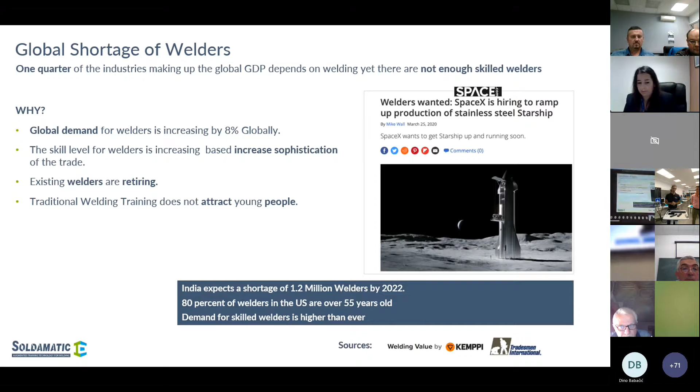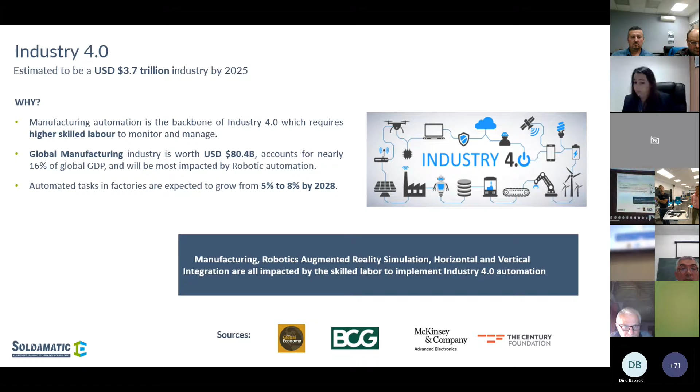Industry 4.0 is here to help as well. Technologies like augmented reality are going to make both the production more efficient when it comes to welding production, but also welding training more efficient. Augmented reality is just an example of that. Also, COVID has made it more and more imperative to digitalize different types of solutions, and this is one clear example. In the education system, we can see that everything is digitalizing, and even practical manual skills like this one.

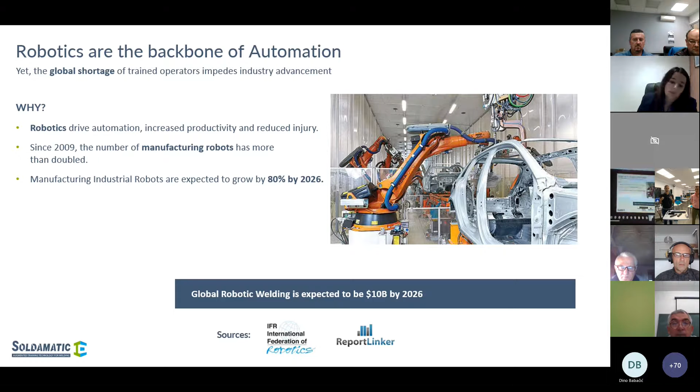Furthermore, we can see that the trend of the industry is to automate, to get robots to replace humans. But in the welding industry, this is an opportunity, but it's also a challenge. The challenge is that you find operators that know robotics, they know how to handle robots, and you have operators that know welding. But very rarely will you find one single operator that knows both things together. And that is a very special challenge that we are also able now to answer to.

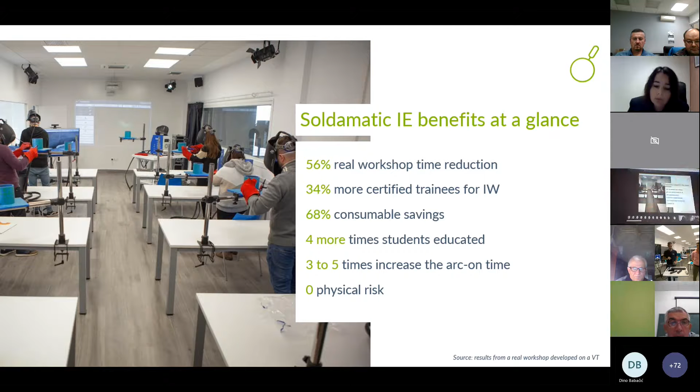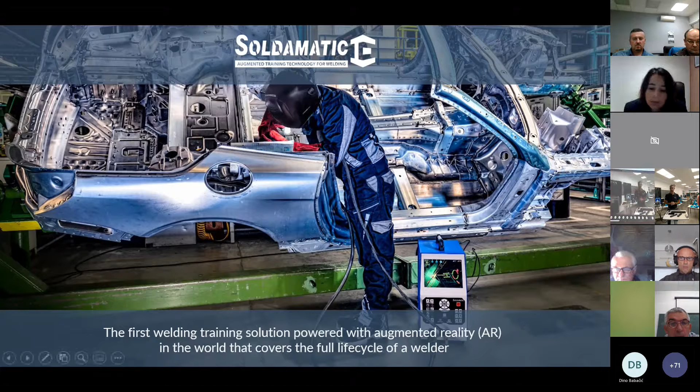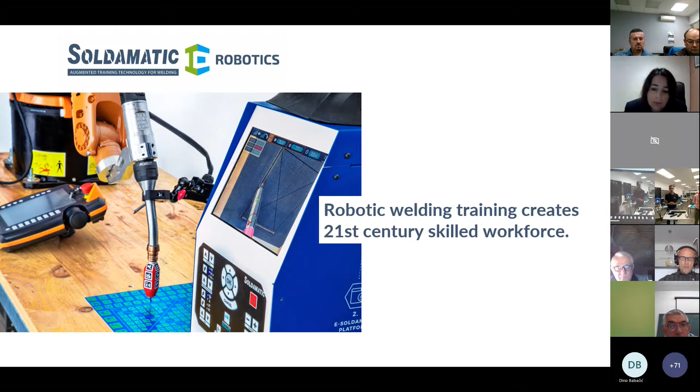Also key to mention, this system is not only for manual welding, as we said, it's also for robotic welding. That means it can be connected to a real robot, and you can do the simulation by working with a real robot as well. This is key, because even though robotic welding is not yet in the curriculum for welding training, it's going to be, because there is a tremendous need for robotic welding operators in the industry. So we are already able to provide a solution to the government for that.

Now we are going to make this a little bit more interactive, and provide you with a live demonstration of the system so you can fully understand how this works, both from the perspective of the teacher and from the perspective of the student. If you have any question in the meantime, you know there is a button to raise your hand. Feel free to use it, and we will clarify during the demonstration.

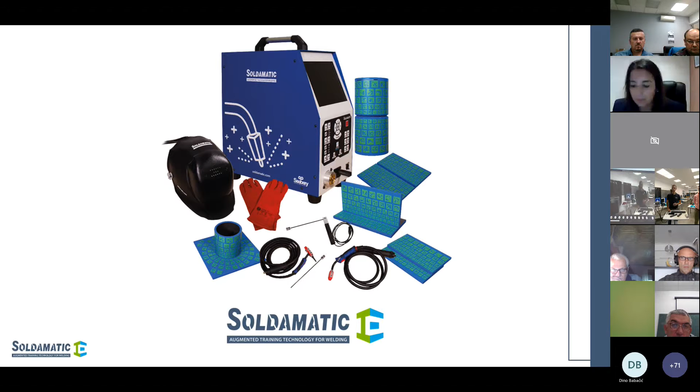Okay, so I have stopped sharing my screen, and what I'm going to do is show you first the components of this system. What you see on top of this table is the simulator, this is the main component. As you can see, this looks like a real welding machine. It's quite light, it weighs less than 13 kilos. The idea is that it looks as realistic as possible.

It is so realistic that the actual helmet you can see here is also real. You can see the helmet is real, but here we have two little cameras. You may notice two little holes, so there are two little cameras. Through those cameras, the student is going to be viewing the augmented reality through this screen.

That screen is inside the helmet. The reason for those cameras is that they are going to be looking at QR codes that you find here, okay? We call these markers. These markers are going to be present in the torches, which are also real. These are 100% real torches. If you put them in a real power source, they work, and this is key.

Why is this key? Because when you are training with a real torch, you are developing your muscle memory. If it is a plastic torch, you are not really developing muscle memory, so that is why this is so important. The cable is heavy because it's real, and the torch is exactly the same that they will find in the real workshop. So this is a MIG/MAG torch.

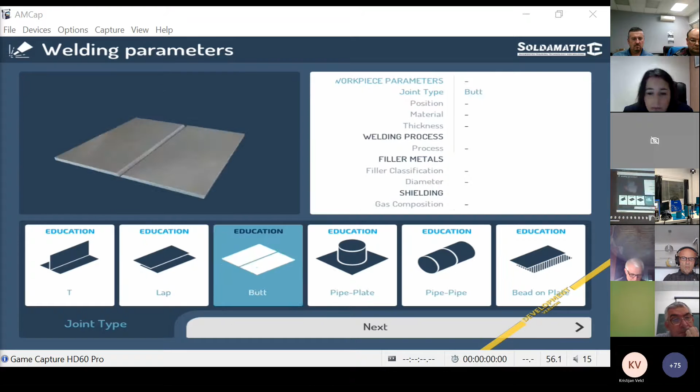Then we will select the coupon. As you can see, I have here all the standard coupons, education coupons we call them. Then we will choose the position, which can be overhead, flat, 3F, 1F, whatever.

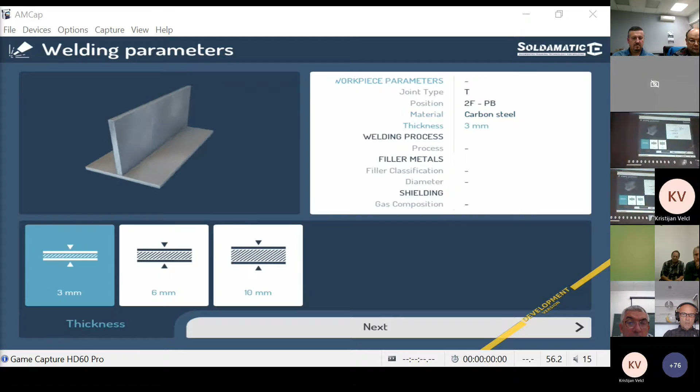Then we choose the welding material that we are going to simulate, which can be carbon steel, stainless steel, or aluminum. Let's choose carbon steel. Then we choose also the thickness, for instance, 6 millimeters.

We choose the process, as we said, we can do any of these processes, and that is important. The student will need to configure the actual torch, so if we choose TIG, for instance, I will need to remove my torch from here physically and put the TIG torch. This is also quite important for the learning procedure of welding.

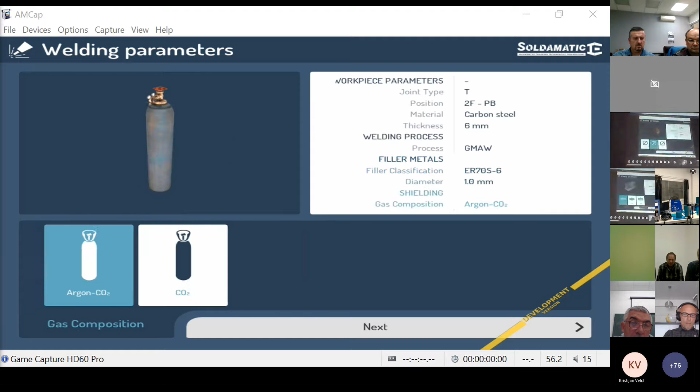Then we select the wire, the diameter of the wire, the type of gas. We are going to select also the length of the welding, the number of passes. All of these can be configured either here or pre-configured by the teacher, so that the student doesn't need to go through all of this.

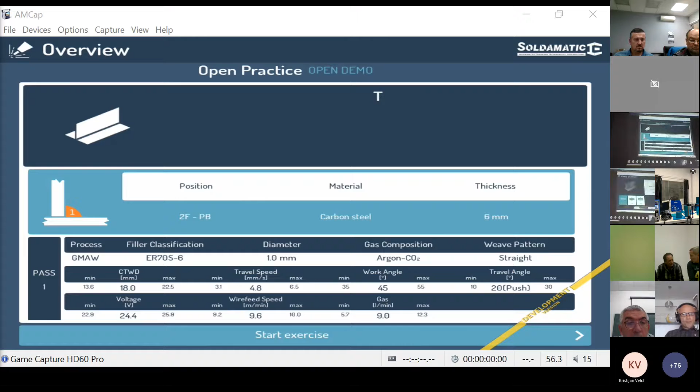And finally, what we see is what we call the welding procedure specification, which is the actual job that the student needs to do.

Now what you are going to see on the screen is what I see through the camera. So you will notice that through the camera, I can see the reality. For instance, I can see Jakub here, I can see my hand.

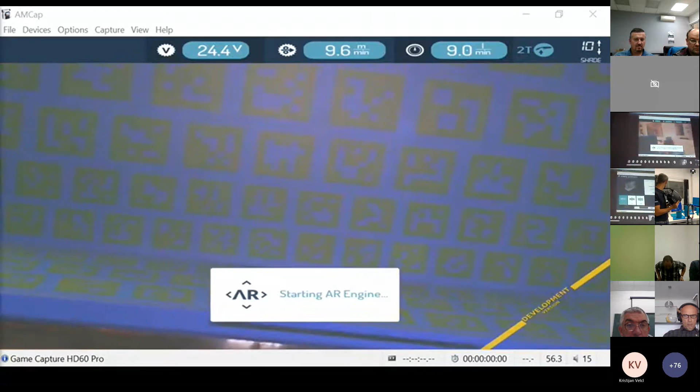And what I'm going to do is activate augmented reality. Once I activate it, the QR codes become a carbon steel T-joint in a PB position. I can even place my hand on it. I can interact with it. This is augmented reality, meaning you can interact with the different elements.

You will notice also on the top bar that I have the welding parameters, for instance here the voltage. So if I went to the control panel, from there I can adjust the different parameters, for instance the voltage. I can increase the voltage.

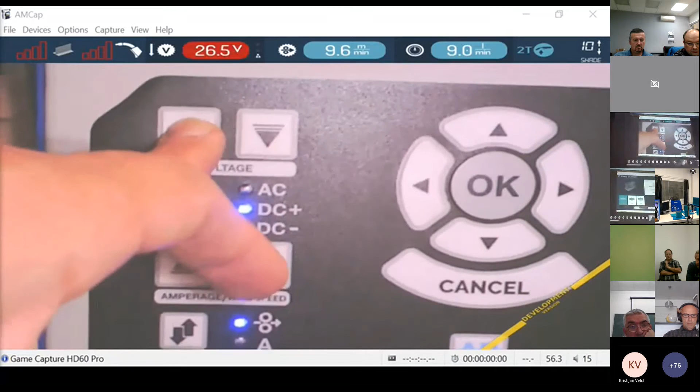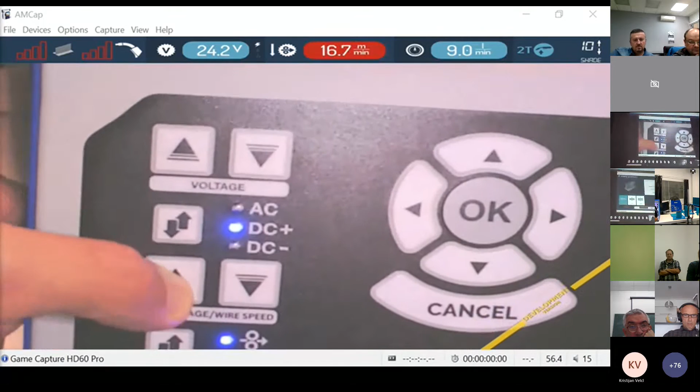And then the system is telling me, watch out, you are making a mistake, you should put it lower. There you go. Same for the wire feed speed, or for the gas, or for the amperage, whatever. All of that can be configured. See, this will be the amperage.

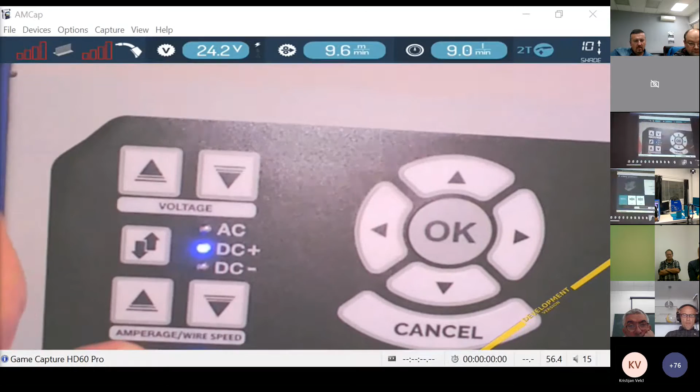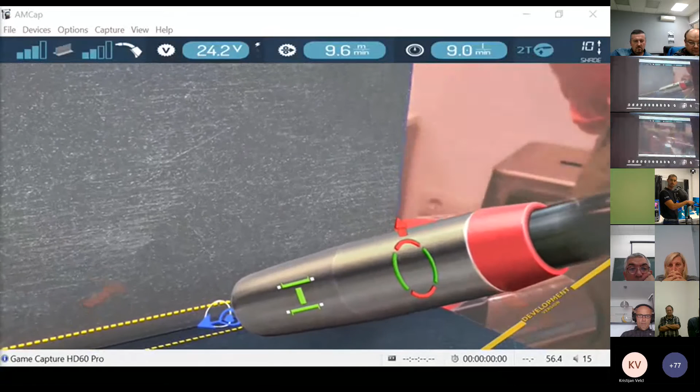Then I will take my torch, and you will notice that the torch becomes also virtual. It has some different green and red icons. Those icons are going to give me live feedback about the performance of my technique. And this is very important because by following this guide, the student is going to be developing muscle memory. So I'm going to put my helmet on now.

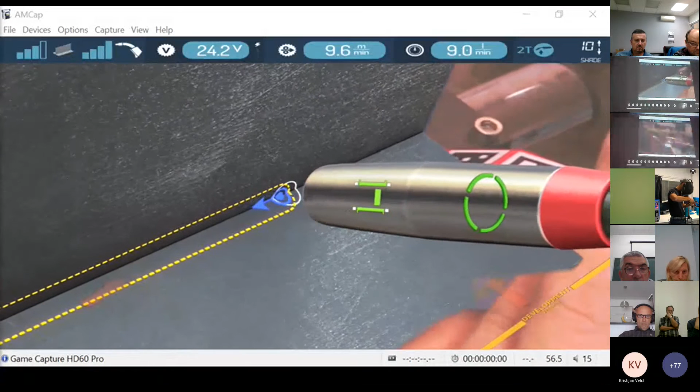I'm going to perform a weld from here to here. There we go. The blue arrows that you can see are giving me the speed, that is the speed that I need to follow. If I went too slow, you will see they become red. If I went too fast, as well. Or if I went too far away, the system becomes red as well. You can see this one.

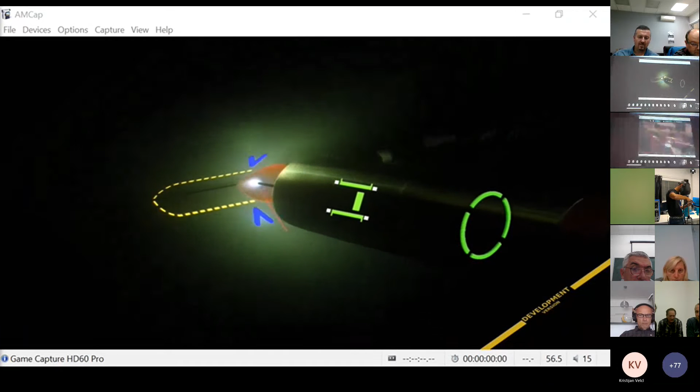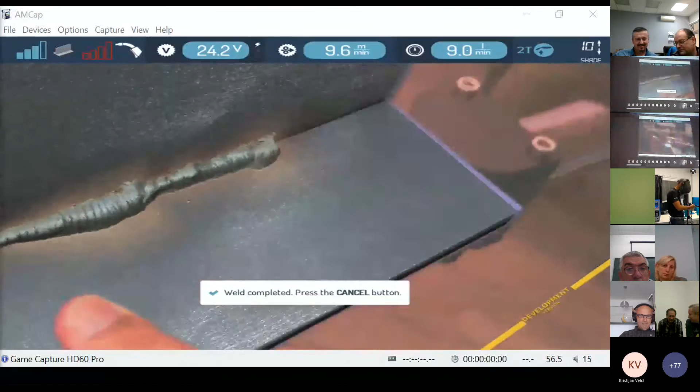There we go. So I can even take the welding coupon, you see? I can interact with it, I can look at it. And this will be exactly the same that we could do in the real welding workshop, okay?

But what is more interesting is that now, when I go to the system, I can ask it for feedback. The system is going to provide feedback to the student quickly and autonomously. This is very interesting because they will have a quicker chance to continue practicing with this feedback.

So what you see on the screen is a mixture of different parameters: work angle, travel angle, contact distance to the workpiece, travel speed, and aim. You will have a score for each of these technique parameters, and the average is 86. All of this is on a 100 scale.

To pass, the student needs to get 90. So that means I didn't pass, I failed this exercise. Why did I fail? Especially my travel speed, which was 68, too low. My contact distance to the workpiece and my travel angle were also below 90, but not too bad. If I had gotten a little more here, I would have passed, because my work angle and my aim were pretty good.

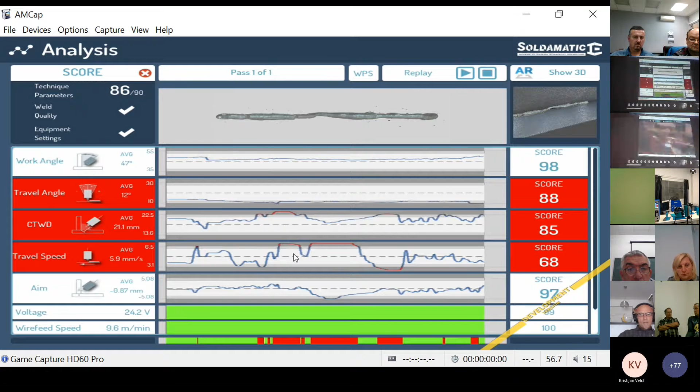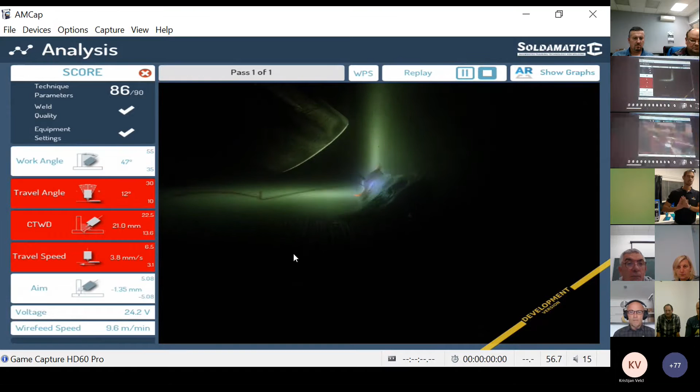But not only that, I will be able to look at the weld again, to look at the simulation. Not only to look at it, but I can even replay the exercise. So as a student, I can look at exactly what I have done, and this is so nice for a student, to see himself.

This is also very interesting to promote cooperation and competition, because when you have two students, or a group of students, they will want to beat each other. And they will learn from each other, what they are doing wrong, what they are doing well. So working together in this type of methodology is very positive.

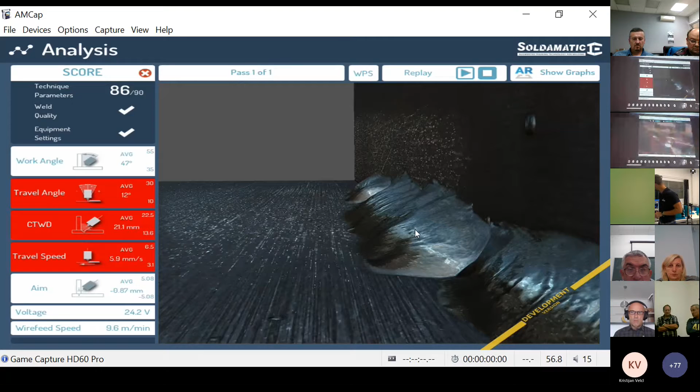Apart from that, this information that we can see in the simulator is going to be stored on a server, which is fully accessible through a platform called e-learning. This is the digitalization platform we just talked about.

So here, for instance, I have the whole list of students. I have Antonio Fernandez, and from here I will be able to read exactly what Antonio has been doing. This is now me, from my computer, as a teacher. I am not a student anymore right now. I'm a teacher at my computer, which is totally connected and synchronized with all the welding simulators I have in my classroom.

By doing this, I can see that Antonio, compared with the rest of the students, is having special difficulties with the travel angle. He's behind the rest of the students. I can also see Antonio's evolution over the last 7 exercises.

Not only that, I will be able to review every single exercise that Antonio has done. Just to give you an example, this one that failed is the one we just did. So that means that, as a teacher, I will be able to review the analysis module of the simulator.

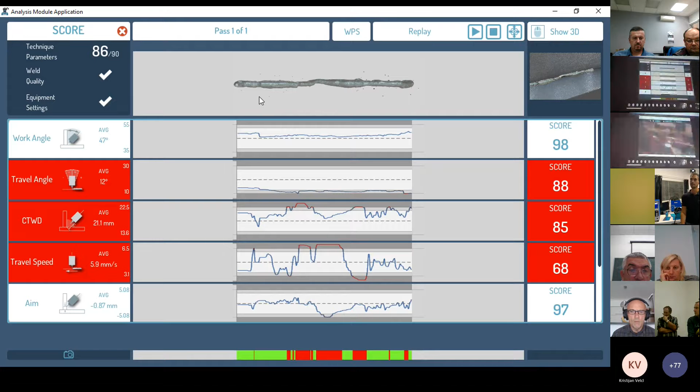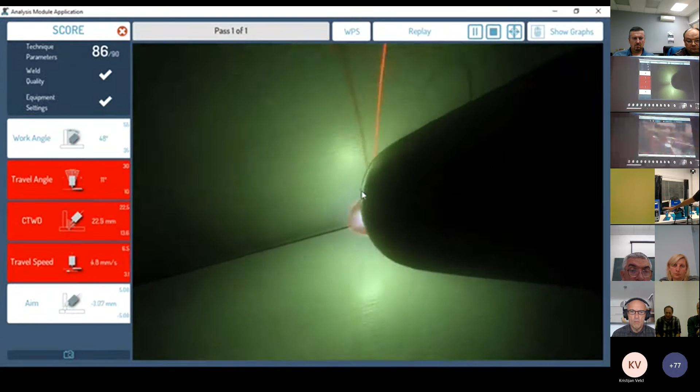I will be able to see exactly the same thing that Antonio was able to see in the simulator. Again, this is me from my computer, I am not in the simulator anymore, I am in my computer. And this, for a welding teacher, is such nice, important information to understand what the student has effectively been doing in the welding booth.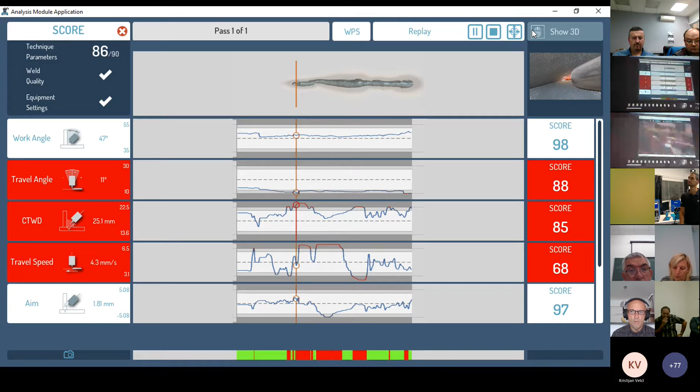But you will be able to even create your own courses. Here you have different theoretical contents, exercises, quizzes, all of that. But you will be able, as we said, to create your own contents. Just to give you an example.

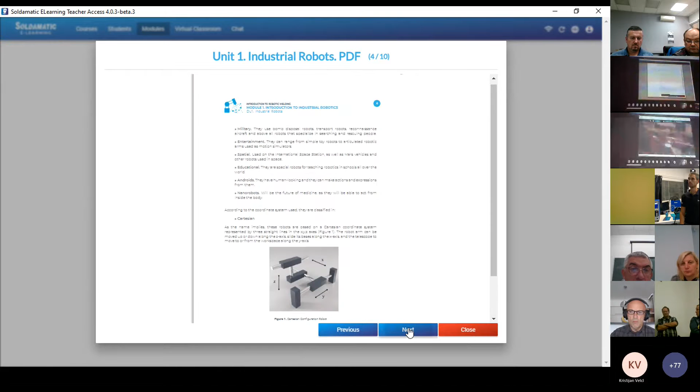There we go. So for instance, there will be an example of a specific content that we have for robotic welding.

All of that can be acquired with the simulator, but you can create your own as well, okay? Or quizzes. Quizzes become like this, with a number of questions, number of answers per question, and so on.

The students will be able to perform all of this content either from the simulator or from their own access to this e-learning platform. They will also have access to this e-learning platform. And one more thing is that the visibility, the synchronization of the student is not only after the exercise, it can also be during the exercise, okay?

So I will show you an example in which we will be able to see the live performance of the student, okay? So I am going to open up a new exercise.

And you will see that Antonio has just started a new exercise, okay? And that Antonio is going to be now welding.

There you go. So now you can see my live performance, okay? You can see the live performance of my hand technique.

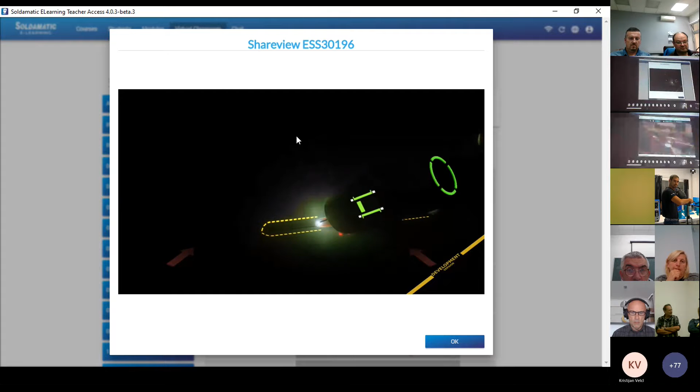I want to mention as well that all this simulation you have seen, the level of detail, the graphics, and all of that, they are carefully crafted, okay? They are not happening by chance.

Every single difference in the simulation, visuals and sounds, comes from real videos of welding exercises that we are doing in our workshop. So let's say that our simulation comes from a huge library of content of welding exercises, in different materials, different processes, thicknesses, with different levels of voltage, amperage, and so on, okay?

Right, well, this is a short demonstration. There are many possibilities to continue doing stuff, but I would prefer to ask you openly what is your feedback, if you have anything to say, if you would like to ask anything, so that we can give you valuable information during this session, okay?

Erika, feel free to moderate if you want, okay? Yeah, Antonio, I think your presentation was great and it's very interesting. Okay, thank you.

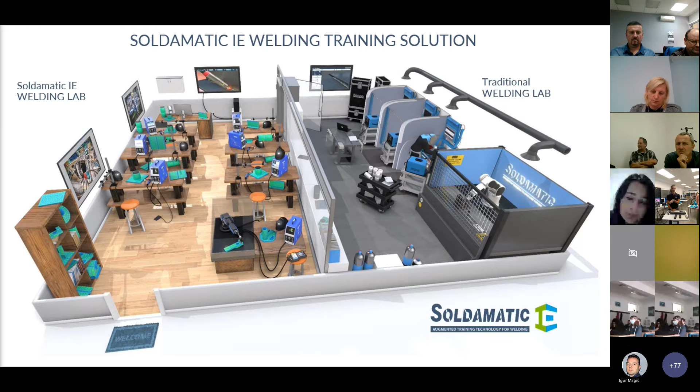Definitely. Well, for the industry, the good thing about this is that it's very objective, okay? The type of feedback that it gives, I will come back to this. Let me open up one example. So let me open one exercise, one second. This, for instance, is one that we just did as well, just before starting our webinar. There you go. So what you see here, this is objective feedback according to a WPS, okay?

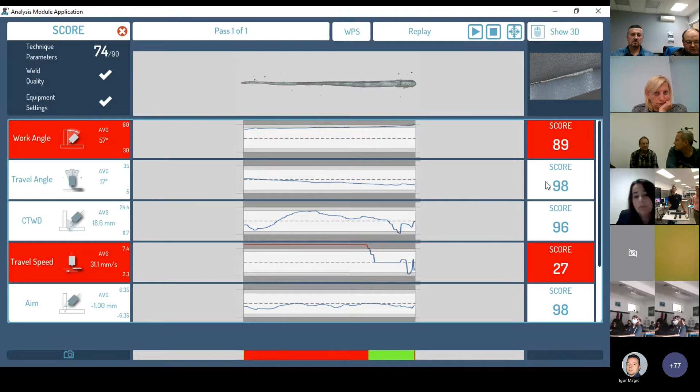And that is what you really want also as a manufacturer. You want, as a manufacturer, to meet the exact WPS. If the WPS is telling you that you need to weld at 4.8 millimeters per second, you need to somehow measure that. And of course, you could do the weld, and then you can make a destructive or non-destructive test. You could do that, but that is going to be extremely expensive.